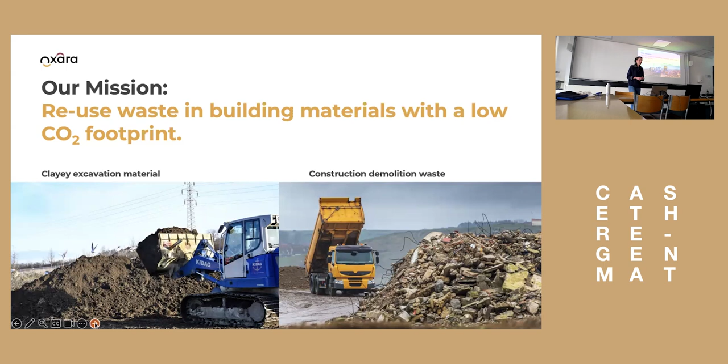The mission of Oxara and our goal is to reuse the waste from the construction industry in low carbon footprint building materials. The two main waste streams that we are addressing are the clay-based excavation waste and the construction and demolition waste. I want to name a few numbers to show the importance of these wastes.

Based on data from 2022 in the canton of Zurich, there were 3.5 million cubic meters of excavation waste produced. Of these, around 65% are used to refill gravel pits or raw material quarries, meaning this material fills holes dug for sourcing raw materials. Another 5% are landfilled in the canton of Zurich, and 21% leave the system boundaries of the canton, meaning it gets landfilled in another canton.

About 9% are reused directly in construction. So the reuse quote is actually pretty low as a building material.

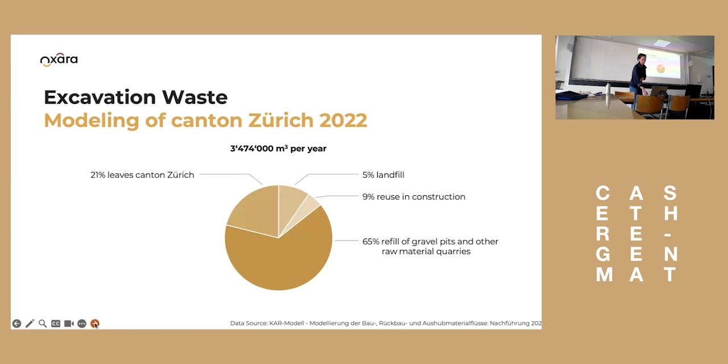On the other hand, compared to the 3.5 million cubic meters of excavation waste, we have around 1 million cubic meters of demolition waste produced each year in the canton of Zurich. There, around 90% are reused in construction, and a really big part of it is reused as recycled aggregates. As a comparison, data from 2018 for the whole of Switzerland shows around 60% is reused as recycled aggregates. The rest is either landfilled or leaves the system boundary of the canton.

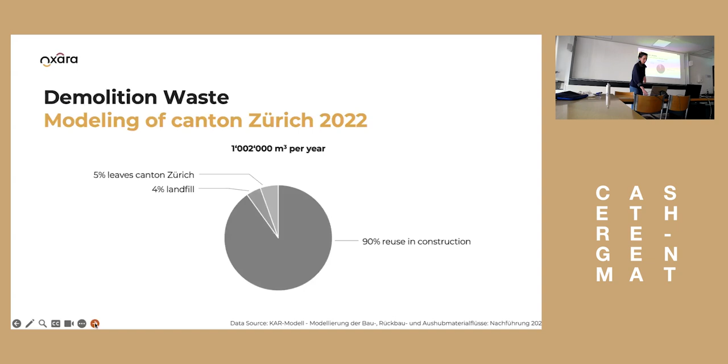So these waste streams that we have each year are huge, and we need to propose good solutions for these wastes. Oxara wants to do it by developing admixtures and binders to be able to reuse these materials.

For your understanding, Oxara is basically like... I hope I'm still online. Yes, okay. So it means Oxara is like the admixture and binder producer, not the producer of the final building material. The building material, the poured earth, is then produced by a material producer like KIBAG, and we are producing, in analogy, the cement like Holcim or the admixtures like Sika. This is our role in the industry.

Schematically, it can be explained like this: for all our building products that we develop, we use water, sand, and gravel. For the excavation waste, we use the earth plus some admixture at a low dosage as the binder. For the demolition waste, we use the demolition waste in a milled form together with some activator as the binder, to produce the earth-based and the demolition-based products.

First of all, I want to start with the earth and some general explanations of how we want to use it. Before I start with Oxara-specific information, I want to make a small detour into some other general earth-based information that we think is important.

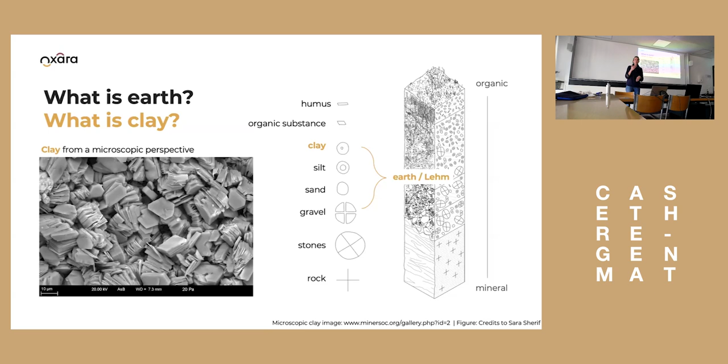On the left side, you can see a microscopic image. You can really imagine these clays are platelets, and these are silicate layers. These silicate layers are the binder of the earth-based materials, and they have a strong interaction with the water. They can actually surround the water molecules around. This interaction is quite decisive for the properties to follow.

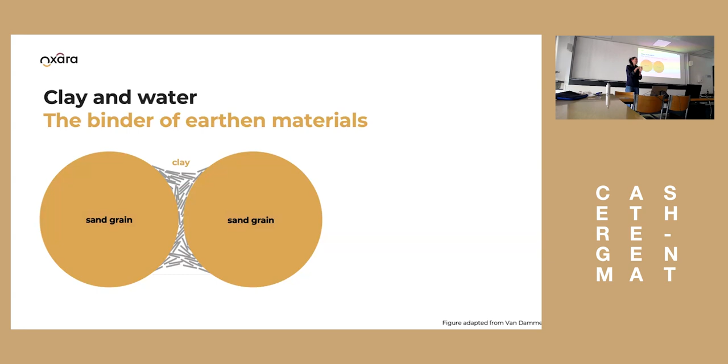To understand earthen material, it's helpful to have this picture in mind: in your earthen materials, you have the different grain sizes. You can imagine the sand grains, and around these sand grains, you have the clay platelets oriented as the matrix around. And if you zoom in even to these clay platelets, you find in between them the water that is in the very small pores as capillary bridges. It's actually these capillary bridges that give the cohesion of the clay-based building materials.

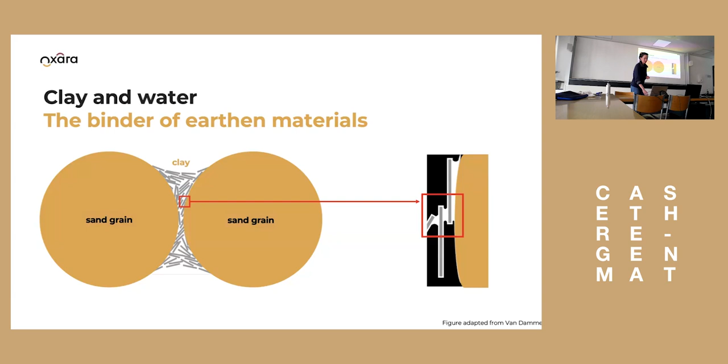It is also this water-clay interaction, and this principle, that is defining for four aspects that I want to point out on earthen building materials. First of all, on this clay-water interaction that is important, it's the drying.

When you want to build with earth, in general, you need to add water to the clay to make it workable to whatever consistency. And once you place your material, it needs to dry - really dry, so all the water needs to evaporate, unlike in cementitious systems, for instance, where the water gets bound by a chemical reaction. Here, everything that needs to go out needs to evaporate.

And that takes time because it goes over the surfaces. It's important to keep in mind that if you, for instance, double the size of your wall, you don't double the drying time - it increases exponentially, as this is not a linear process. So drying times in earthen constructions take time.

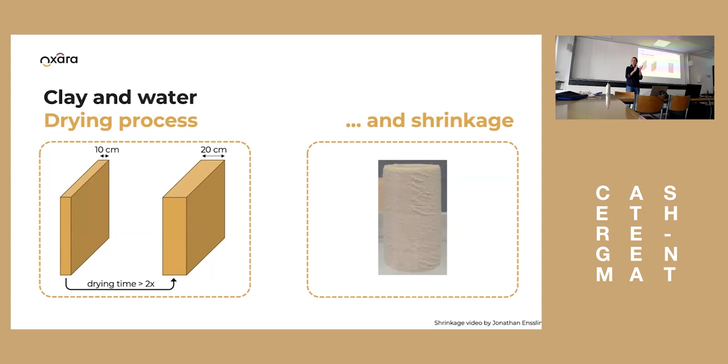And then along with the drying comes the shrinkage. You have the water around these clay particles, and at first, maybe the clay particles don't touch each other because they're separated by the water. Then once the water starts to dry and evaporate, it leaves the system, and that leads to a volume change. That volume change can be quite drastic, as you can see here in this video, where you can see how a clay cylinder shrinks.

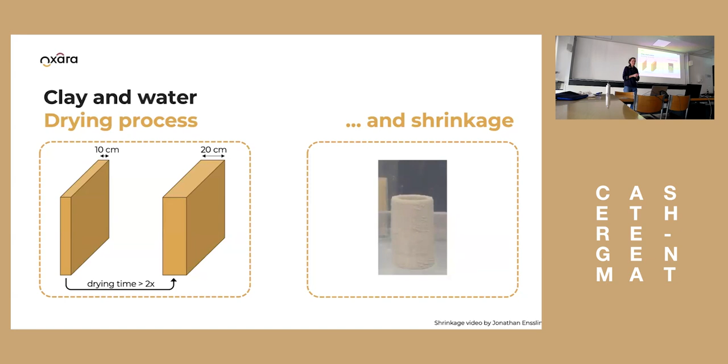I can play it maybe one more time. This is, of course, a very extreme case when you have only clays and not sand and not gravel, which reduce the shrinkage. But yeah, earthen materials have shrinkage. This is because if the water withdraws, these capillary bridges also pull the material together. It's important to keep this in mind for earthen construction.

The second aspect is the compressive behavior of the earth-based materials. You might have heard that earthen construction materials should be used as compressive load-bearing materials. They are very weak in tension or in bending, and this is also due to how they get their cohesion. It's important to know that the compressive strength is dependent on the moisture content of the material, or on the relative humidity that you have in your room.

The reason is that the clay, or the clay-based construction material, can absorb the moisture, so it gets adsorbed around these clay particles. But if you have this water adsorbed around the clay particles, it also means that you weaken these capillary bridges that I was showing in the beginning. So you lose the strength when it gets more moist.

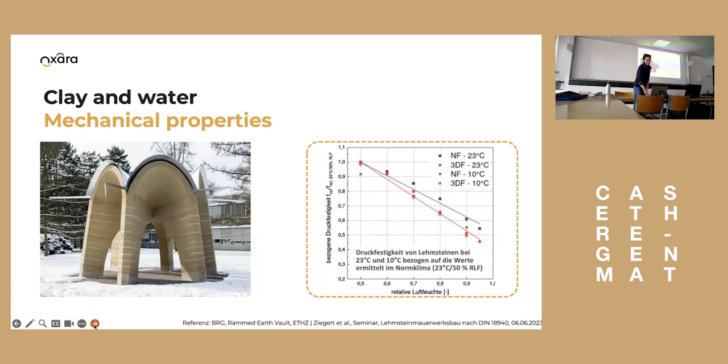Concerning building physics properties, the density of massive clay-based construction materials can be assumed around 2,000 kilograms per cubic meter. Clay itself has a high thermal capacity due to its mass, but it also has a high thermal conductivity, so massive clay is a bad insulator. Clay in a massive construction technique can give good sound insulation, and it's non-flammable. So that's concerning the building physics properties.

I think in the slides before, high thermal capacity and so on - I think these are linked to some depth of the wall. You cannot have a very slight wall and then have a very high thermal capacity. All these are linked to something, you know what I mean? I know what you mean.

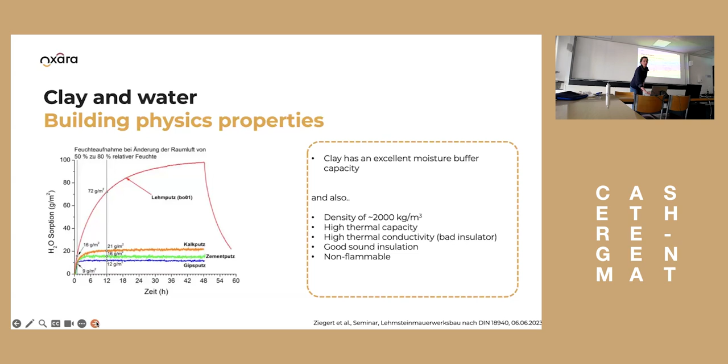Of course it is linked to the thickness that you bring. If you only have a 2 centimeter clay plaster, you don't bring a lot of mass. But the point is that the particles of the clay itself have a high density, around 2.7, and if you have them well compacted, you can bring a lot of mass into the building. Compared to some other materials which don't even have that basis, you can use clay in that way. It would be interesting to know when we can say a wall has this high thermal capacity and from which point - so that we understand what it means to build a compact wall or not. We can maybe get back to it at a later stage.

The fourth aspect, related to this clay-water interaction, is durability. The clay platelets are not bound, they're held together by water, but that also means that if you introduce more water, the clay material is not stable. So earth-based construction materials erode when exposed to rain, and they are not water resistant. Here is a picture of the Vogelwarte Sempach, where one facade part was exposed to the rain, and another was protected from the rain by a balcony. As you can see, the difference is big, and I think this is something to keep in mind as a general aspect for earthen construction materials.

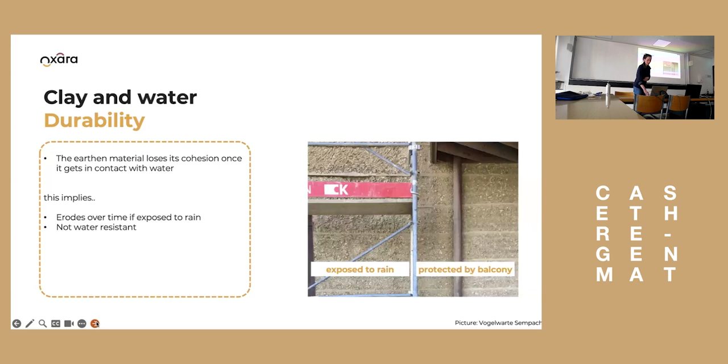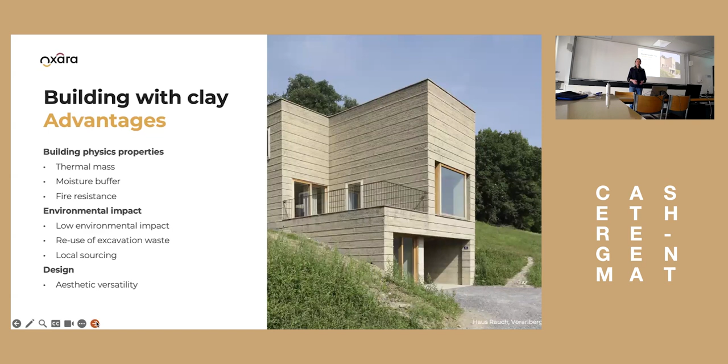To summarize on earthen construction materials, we have the following advantages. From the building physics property side, you can use clay-based building materials to introduce thermal mass into your building. You can use it as a moisture buffer if used in the interior, and it can give some fire resistance, also protecting other building materials. The advantages on the environmental side are a low CO2 footprint - you reuse excavation material, which is currently more or less dumped material, and you can source it quite locally as it is widely available. Also for design, the options on how to use it are broad.

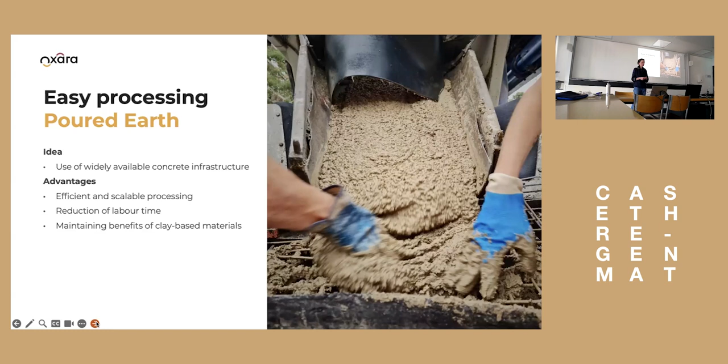But then the question arises: it has advantages, it's widely available, but why is earthen construction not more used? There are many reasons, and one we want to tackle is processing. Some vernacular construction techniques use a lot of human power and need more effort, and Oxara is looking into easier processing. The idea is to make the earth pourable, and if it's pourable, you can use the same infrastructure already widely available for conventional concrete. The advantages would be faster processing and a reduction of labor time, but while maintaining the clay-based material properties.

So this is the idea, and how does it work?

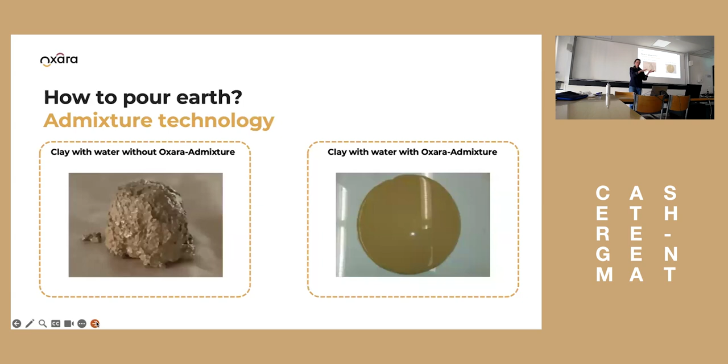The idea behind the admixture technology is that if you have clay and mix it with a certain amount of water, you can reach a plastic state. You could reach a more liquid state by adding more water, but you don't want that, because adding more water means much higher shrinkage and too much water introduced. Later it cracks and loses its strength.

So the idea is to change from plastic to liquid with an admixture, not by adding water. Going back to these clay platelets, they have a surface charge: on the edges they are charged positively, and on the sides negatively. In a normal state, the positive charges are attracted by the negatives, and the clay platelets arrange in a card house structure, which allows them to hold a lot of water in between.

If you introduce a dispersant, an admixture that changes the surface charge on the edge from positive to negative, the edges get repelled and disperse. If they're oriented in this parallel way, they can much more easily slide past each other, giving you higher fluidity with the same amount of water. That's the principle of the admixtures we are using.

Then if you want to stop the fluidity because you've placed your material, you want to reverse that effect, and you do that by adding a coagulant that consumes the dispersant.

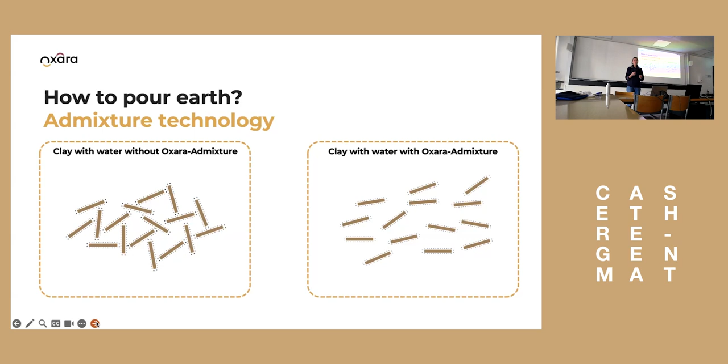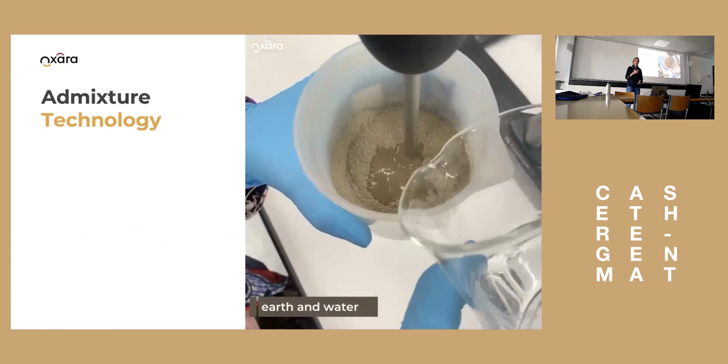Here we have a lab demonstration on how this works. First you mix the dry earth with a certain amount of water, and then you mix. With this amount of water, it's not fluid, because it was not enough water.

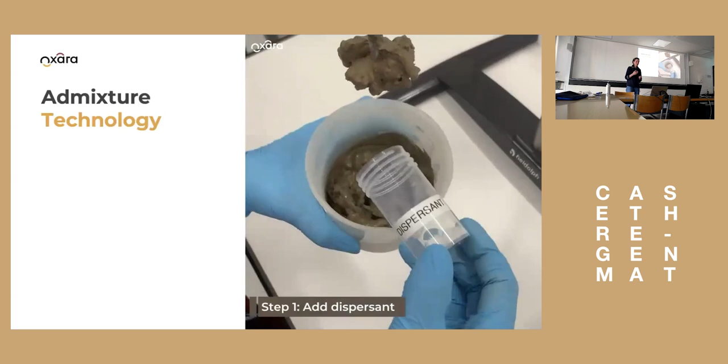Then you add the dispersant and mix it in, and you get a very well flowable paste that is also suitable for processing on a construction site. Then you add a coagulant.

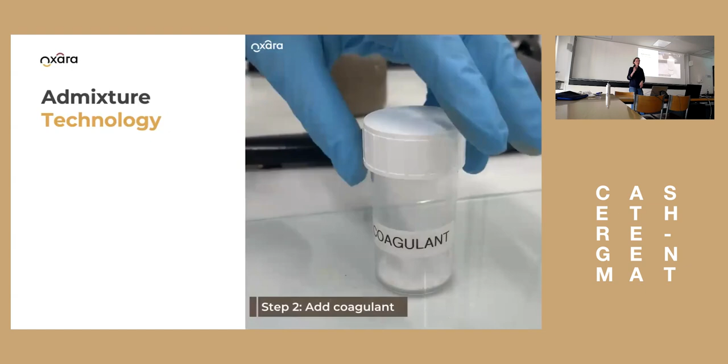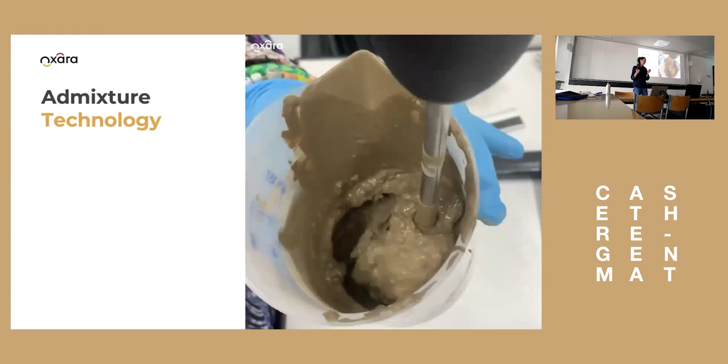Here in this video, for demonstration purposes, we use a coagulant that reacts really fast. As you can see, it already starts to stiffen. But of course, on a construction site, you don't want such a fast reaction, and it's also not possible to add this coagulant after you've placed the material.

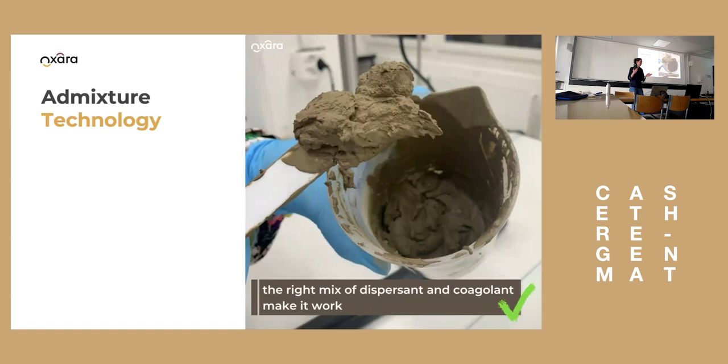So everything needs to be added at the beginning when you mix the material, but that means you need to choose a coagulant that reacts rather slowly, so you have enough time to process the material.

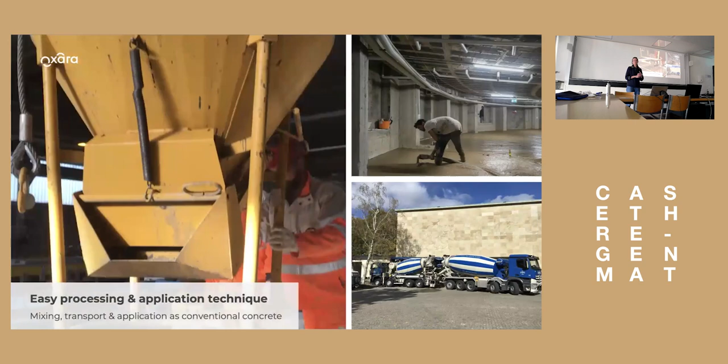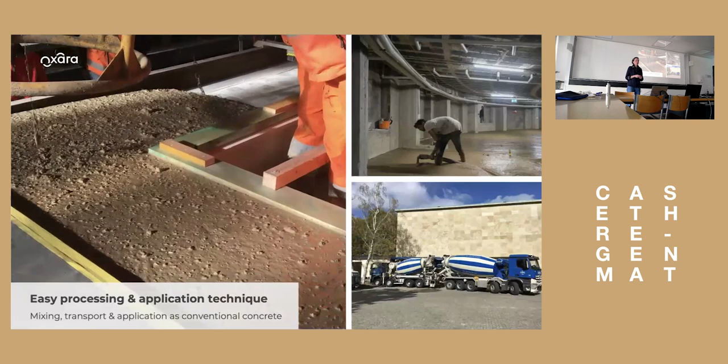Here you can see in this video how that looks on an industrial scale. The material can be processed with conventional concrete infrastructure, and it can also be pumped, as you can see on the right-hand side. So this is the basics of our technology used for clay-based construction materials.

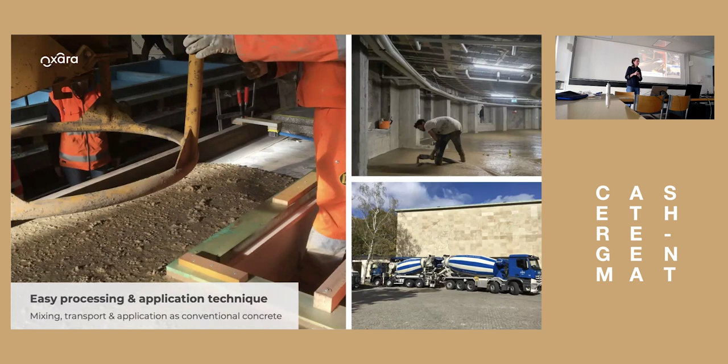Of course, when speaking of admixtures, the question soon arises of when the earth is still unstabilized, and when it is stabilized. I think it's a very important discussion to have, and for each project you should carefully consider what is more suitable. That's why I want to quickly dive into the topic of unstabilized and stabilized earth.

The way we see it, unstabilized earth is earth that is not water resistant. It's still soluble in water and dissolves, as its strength mechanism is only drying. So if it only gets its strength from drying, then if it's in water, it dissolves. This is unstabilized earth.

If you introduce a reactant or chemical that consumes water and reacts with it, binding the water and also binding the clay platelets—more or less depending on the dosage—then you stabilize it, and you can put it into water and it will not dissolve anymore.

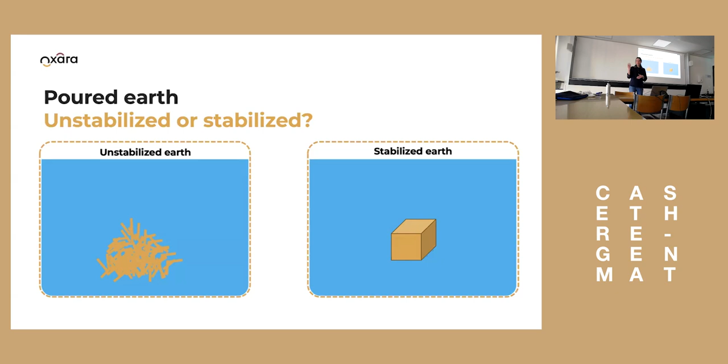Often at first look, one could say it's very practical to stabilize the earth, because then you avoid challenges like its strength depending on moisture content, or needing to take so much care on durability. But of course, it's not that easy.

I think the careful evaluation should consider the following points. For unstabilized earth, as I said, it dissolves in water, and the stabilized doesn't. This is because the source of strength is purely the drying for unstabilized, while for the stabilized one, it's the drying plus a chemical reaction. Because this chemical reaction binds the water and also binds the clay particles together, the strength development is accelerated.

Unstabilized earth has a rather slow strength development. It also depends on when you remove the formwork or how fast it can dry. For the stabilized one, you have some reaction taking place which gives you a bit of a boost.

If you look at the dry strength or the end strength of the material, that story is not that clear anymore - what's better, unstabilized or stabilized? In general, poured earth has a compressive strength between 2 to 3 megapascal if unstabilized. If stabilized, using a low stabilizer dosage can actually disturb the clay matrix first and you lose strength, so you need a high dosage to increase strength higher than the unstabilized case, because you first disrupt this clay network when you introduce a stabilizer. So it's not the most efficient to use stabilization only for a high end strength, because then you often need high stabilization dosages.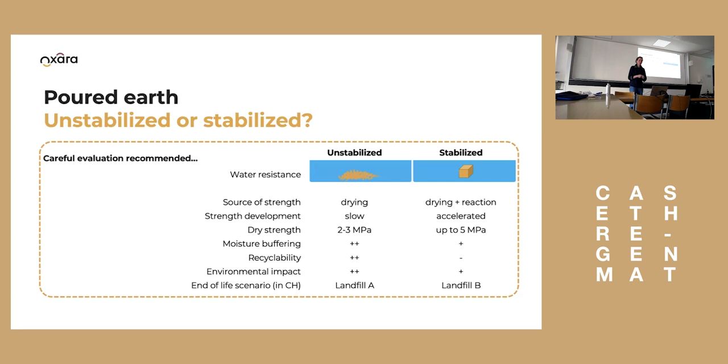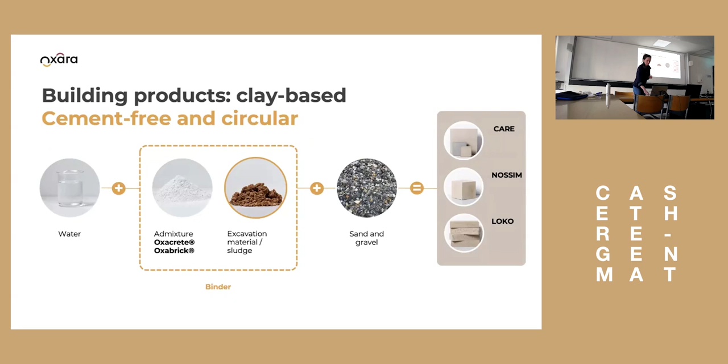Having said this, now we go back to the Oxara earthen product. As a reminder, the way we use it: we have the water, the clay and the admixture as the binder, add sand and gravel, and from this we have 3 different building products. We have 2 poured earths - the Oxara Care, which is the unstabilized poured earth, and the Oxara Nossim, which is a stabilized poured earth. And then we also produce a stabilizer for compressed earth blocks.

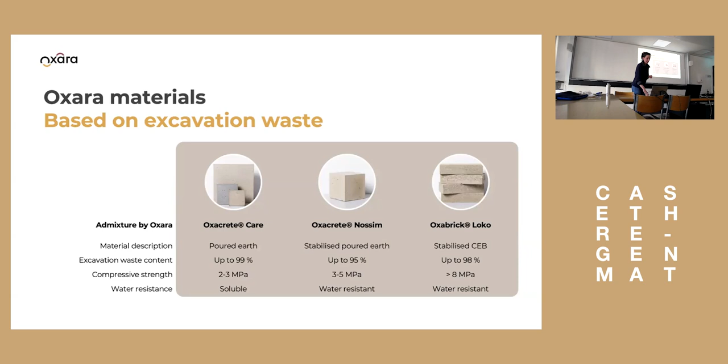Then there's the question of how to use this material in a building. We recommend, to benefit from the moisture buffer capacity of these clay-based building materials, and also because durability is limited when exposed to rain, that interior use for earthen materials is suitable. In interior use, we recommend either non-load bearing or very low load bearing walls or screeds. Also very suitable are hybrid elements where, for instance together with wood, the wood can do the structural part, and the clay and massive earthen construction material can give thermal mass and take the moisture buffering. So these are the 3 main applications for earthen materials that we see.

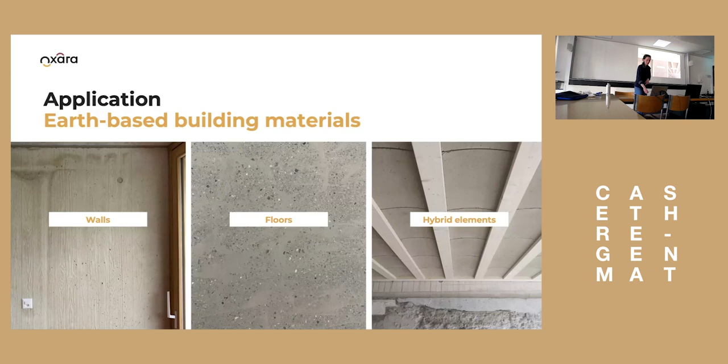Now I want to present a few project examples. The first project example: there were 2 houses built in Vandœuvres, a garage and a pool house. It's a 1-story building, the walls are not load bearing. This was done with stabilized poured earth because the client and the contractors chose to build with it.

What's special here is the detail of the walls, you can still see the texture of the wood from the formworks. This is only possible because the poured earth is in such a liquid state that it can actually adapt to the structure.

We recommend interior use, but a lot of people, if they use earth, want to display it towards the outside too. Then it's very important that you use a good hat and shoes, as it is done here. The roof needs to protect the walls from the rain, and the concrete part at the bottom needs to protect the earthen wall from capillary rise from the ground.

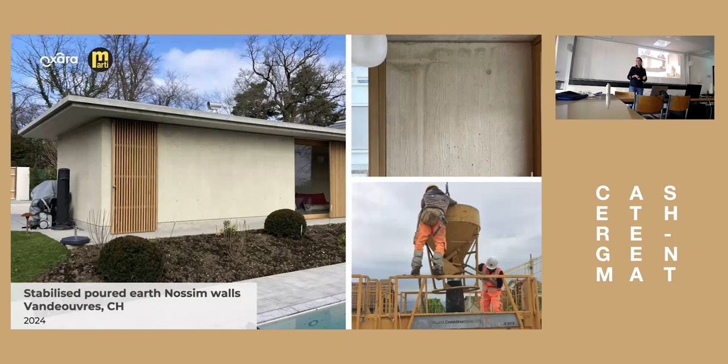Here, quickly, the technical specifications summarized. We recommend for this poured earth wall a thickness larger than 25 centimeters, and a maximum height of 4.5 meters, because if you go higher it gets tricky to demold the walls. With a prefabricated process it might be different, but if you want to demold, you need enough strength to take away the formwork, and if you don't want to overstabilize, there is a limit in height.

You need to plan dilatation joints, we say every 4 meters, to avoid shrinkage cracks.

On the environmental impact, we compare it to a calcium silicate block wall of 18 centimeters. If you compare the Nossim wall to this block wall, you have a reduction potential of 40% in CO2 equivalent.

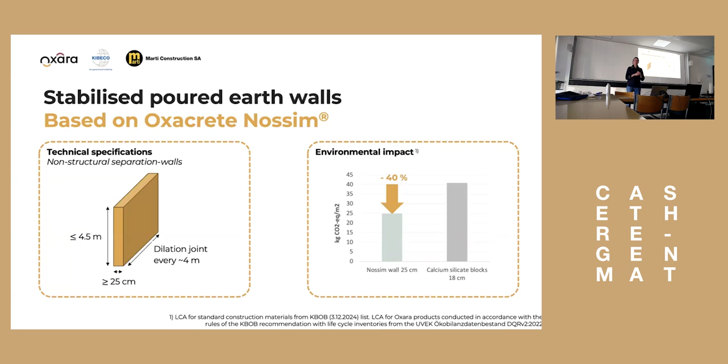So I go on to the next application and project example. Here you can see the first residential floor that we built at Ackersteinstrasse in Höngg, Zurich.

For this project it was a concrete slab, then some cork insulation, and an 8 centimeter thick floor casted on top. It was cast in situ by pumping and then left to dry. The floor cracked, and the cracks were filled with an earthen mortar, then they made a terrazzo finish, meaning they grinded and polished it as is known for terrazzo.

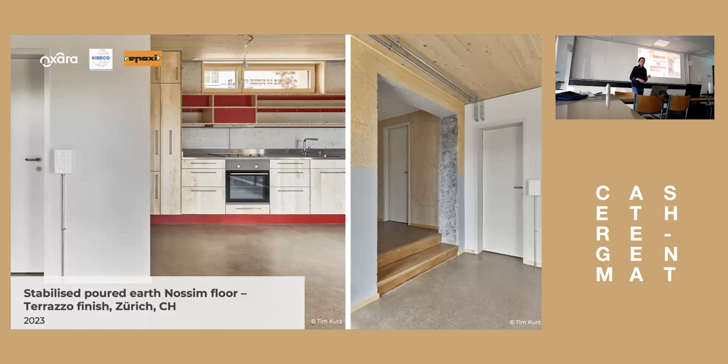For the floors, we have the following recommendations: earthen material or poured earth can be used for screeds or terrazzo floors, but only for residential areas, because for public areas the point loads are too high, and also the possible abrasion that can happen.

You need to look for a suitable surface treatment. We currently recommend some Wasserglas, so sodium silicate, and some stone oil that we are using, but this is still a bit of trial and error, also depending on what's most suitable given the project or where the client feels confident enough to use whatever surface treatment you propose.

It's compatible with floor heating, which can actually be beneficial for earthen floors, as you can speed up the drying process when you start to heat. For the build-up, it's important that between the earthen layer and the sound insulation, which is rather soft, you have a load distribution plate, because the earth is soft as well, so you need to distribute the point loads and avoid too much bending caused by the acoustic insulation.

If we compare the Nossim screed of 8 centimeters to a cement screed of 8 centimeters, there's a saving potential of around 45%. But as this is a stabilized floor, it's not easy to say one number, it also depends on the stabilization dosage you are using.

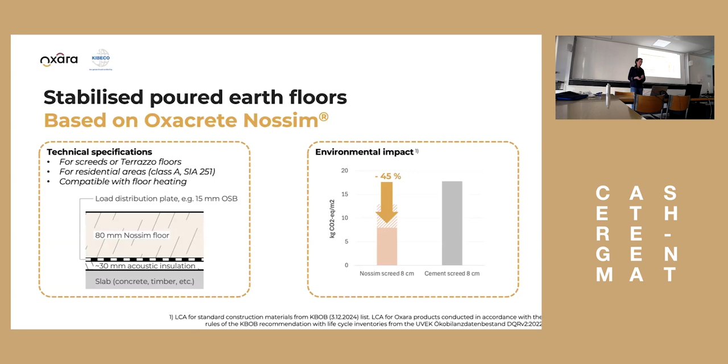For the screeds, we recommend 8 centimeters. With other conventional building materials you can go lower, but as the earthen material does not comply with the norm for screeds, we recommend higher thicknesses so you don't get problems with bending.

Another project I want to present as a representative of an earth-based hybrid project is a timber earth slab at Altichesi in Rotkreuz. It's an old cheesery where they built a hybrid earth-wood ceiling, and the ceiling was cast in situ since it wasn't possible to bring prefabricated elements into the building.

For hybrid wood elements in general, it doesn't need to be a ceiling, but the two materials can profit from each other: the wood takes the structural part, and the clay-based materials bring the mass, the moisture buffer, and some acoustic insulation.

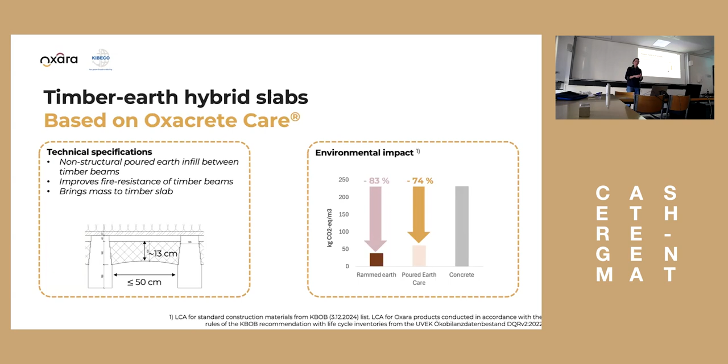You can see the dimensions used in this project. Concerning the environmental footprint, we don't have numbers comparing this building system to another slab, but we can present the CO2 footprint per cubic meter if used as a filling material. Comparing conventional concrete as a filling material to poured or rammed earth, you have savings potential up to 80%.

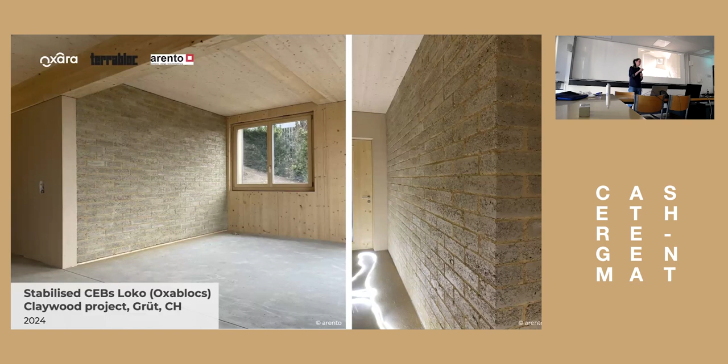The last project on the earth-based side I want to present is the blocks, used in a residential building in the canton of Zurich. They serve as sound insulation and separation walls. A clay-based mortar was used to mason the stones together. The blocks are produced by Terrabloc and available in the dimensions shown.

You can use either a clay-based mortar or a conventional mortar. The tricky thing with the clay-based mortar is that it's not commercially available everywhere, so you need a supplier or source to get it. It's harder to get, let's say it like this.

For the blocks, there's the SIA norm 266, which declares masonry. This declared masonry doesn't specify the material it needs to be made of, but defines material properties, and the stones and mortars comply with this norm so you can build using declared masonry. Comparing the Oxara blocks to fired clay bricks, you have a saving potential up to 50%.

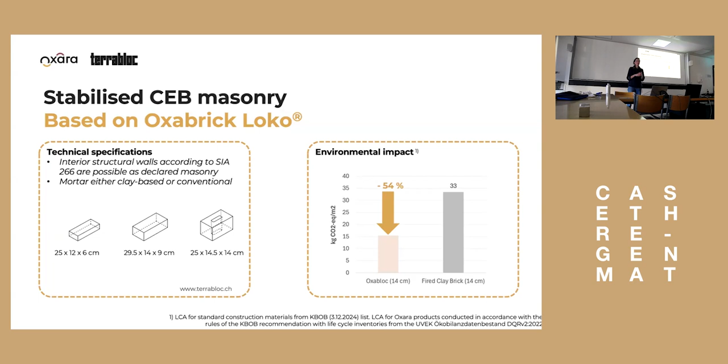The outlook on earthen materials from our startup side is that we continue doing research. In the Innosuisse flagship Think Earth, we have a sub-project researching robust earth mixes, trying to make a step towards industrialization of earthen materials, and also testing large-scale earthen building elements like walls or bigger masonry to study the scale effect.

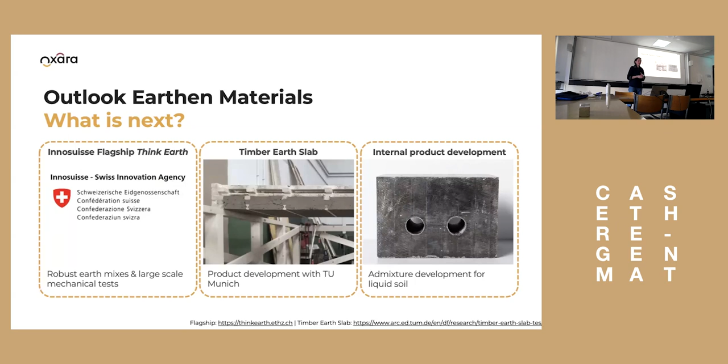We're also engaged in a timber earth slab project with the TU of München, researching producing a hybrid ceiling element. Internally, we're developing a liquid soil used to fill trenches and surround pipes to protect them, and our goal is to do that without cement.

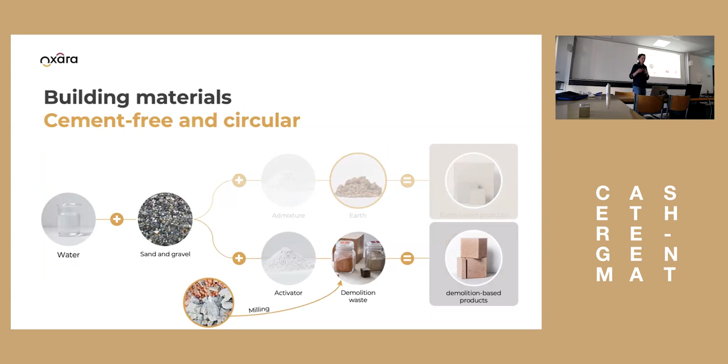That was the earthen side; now we'll jump to the demolition waste-based side, where again we use it as a milled material. First, what is demolition waste and how is it used nowadays in Switzerland? Demolition waste is a mixed composition of bricks, concrete, natural stones, and other mineral construction materials present in a building. There's a distinction between concrete waste, which is pure concrete waste, and mixed demolition waste.

It's produced in the following way: if a building gets demolished, you first demolish the upper floors, and very often these aren't separated, so the bricks and masonry aren't separated from the concrete, generating mixed demolition waste. There are two reasons it's not separated: first, it's too expensive; second, if you just took the concrete waste out, you'd lose quality for recycled aggregates. You actually want a certain fraction of concrete aggregates inside your mixed demolition waste, because that increases the quality of the recycled aggregates.

When the floors below ground are demolished, that's often where you get pure concrete waste, because the floors below ground are very often built in pure concrete. So you can see the composition of demolition waste can vary quite a bit.

It's very heterogeneous, and it also depends on what building you demolish, from which year it was built, because either it has a higher percentage of masonry or a lower one.

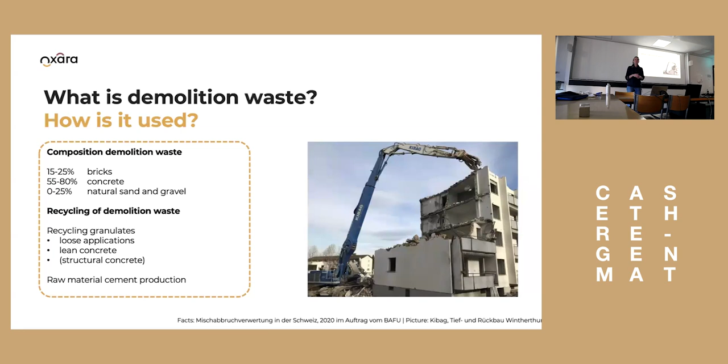And then the fourth option is to not use it as recycled granulates, but to use it as a raw material in cement production. And if it's used in cement production, it is milled. An example for this is the Susteno cement.

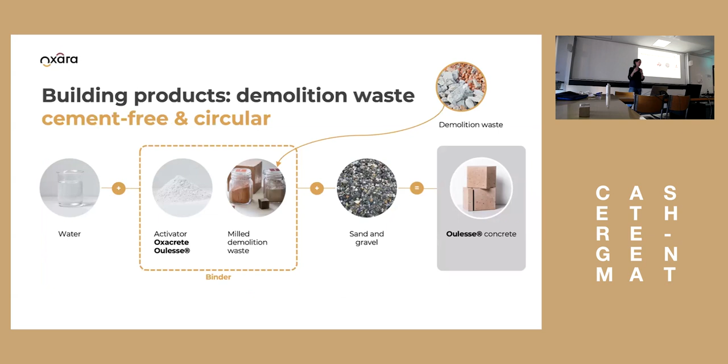So now I'm going to show, illustrating again how Oxara is using it. We are milling the demolition waste and combining it with some activator, and then we have water and this binder of milled demolition waste, where the demolition waste accounts for up to 50% or around, and then we add sand and gravel and have a concrete-like material, but with a cement-free binder.

We are following this strategy because we see the need to propose a solution for the fine fractions of the recycled granulates too, since these particle sizes can vary a lot. By milling, one can at least control this heterogeneity, and that's the approach we want to take, using it in the milled form.

The advantages of using demolition waste in construction materials are, let's say, obvious. You reduce the CO2 impact of the binder you create, and that means you also conserve natural resources by reusing the demolition waste, and you save landfill space. So for an idea, if you use 1 ton of that binder, you can save up to 400 to 600 kilograms that would otherwise go to the landfill.

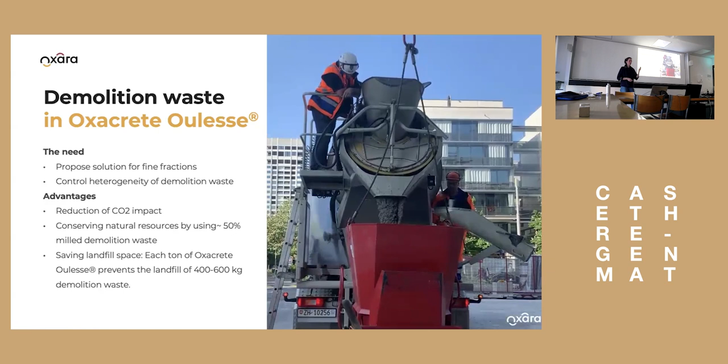There is a little illustration in the video on how it's cast. So if you see it from the outside, it's really similar to concrete and used similarly.

Now I want to give you an overview of the technical specifications of that cement-free binder. The technical specifications relate to exposure class, so for what you can use that binder, for which kind of concrete, in which application. The exposure class is basically X0, so it should not be critically exposed to either freezing and thawing or to carbonation.

Quickly on carbonation: when you have a cementitious concrete, it has a very high pH, so it's alkaline, and that high pH protects the reinforcement bars in the concrete. So for cementitious concrete, you have protection from corrosion by the high pH of the concrete.

Carbonation means that if CO2 from the air ingresses the concrete, the CO2 reacts, and that reaction decreases the pH. So you want to make sure that the pH of your concrete stays at a high level so that your reinforcement bars are protected from corrosion.

So one is actually measuring, for binders, the carbonation resistance, meaning how fast they carbonate, how fast they lose their pH. In our case, the Oulesse binder has a lower pH and it does not comply with these carbonation limits given for where carbonation limits are required. That means that if you use a reinforced Oulesse, currently you have to use it in applications where corrosion is not happening because there is no moisture.

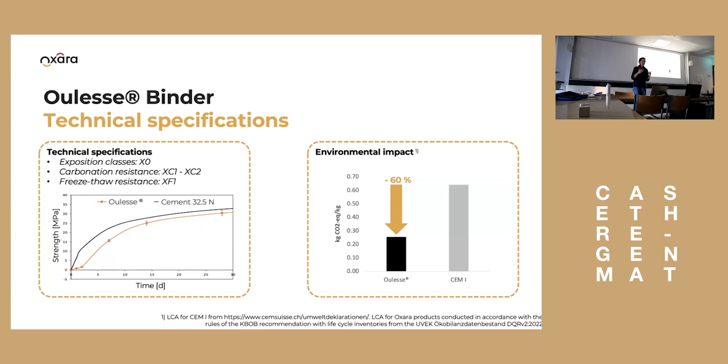Then for the environmental impact, compared to CEM I, the Oulesse saves up to 60% of the CO2 footprint. So to summarize, for this new binder, as is often the case with alternative binders, you need to be careful with the exposures you use it for, because it cannot fulfill the carbonation limits, and in this case we also have the limited early age strength development.

With that in mind, based on our current development state, we are working on the following applications and propose lean concrete, screeds, and pavers. The reasoning is that they are not critical in terms of exposure, they are not reinforced, and they don't have a formwork where demolding times or early age strength development might be critical.

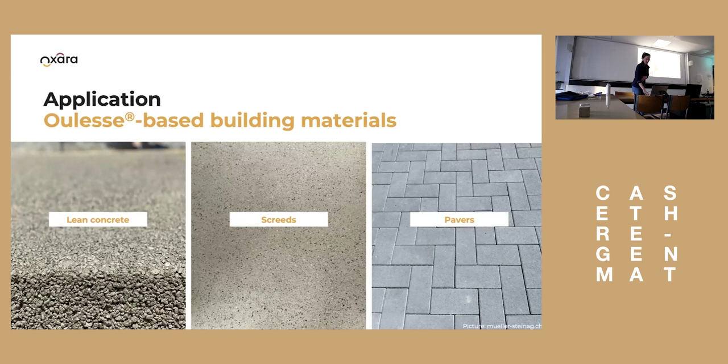Yes, these are the three applications, and here are a few project examples. Here you can see how the Oulesse lean concrete was built in at the Zurich airport by Kibeco.

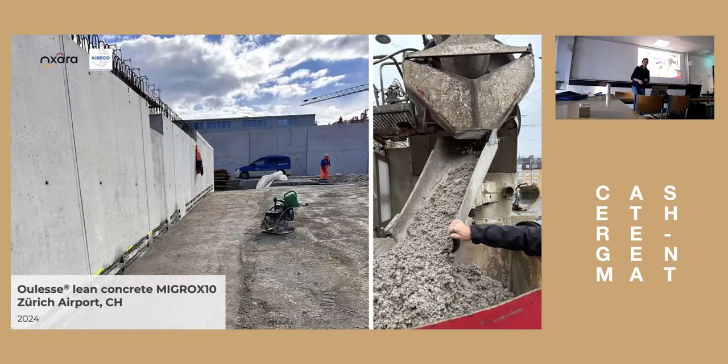On the left side is really the first terrazzo of Oulesse that we tried in our labs, and then this Oulesse terrazzo was built into the Pavillon Manal in Horw as the first screed, built in by Repoxit.

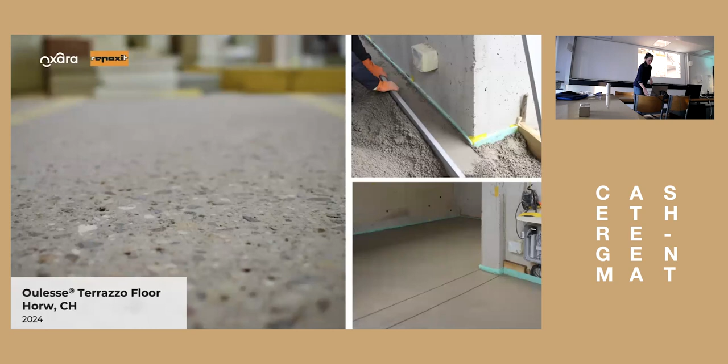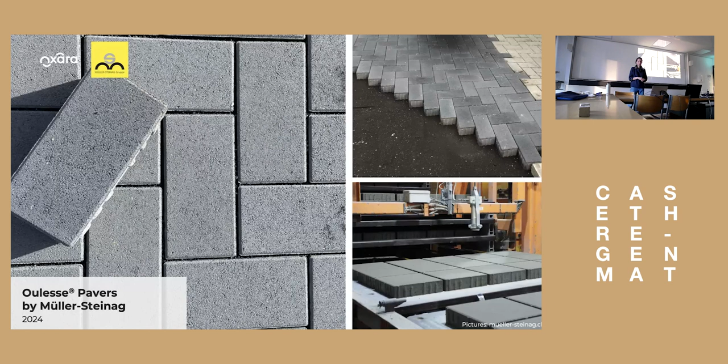And we have this development with Müller-Steinag on the pavers that are produced by Müller-Steinag. When using Oulesse, they can save up to 30% of CO2. So these are the three applications for Oulesse.

What is next is that we are internally working a lot on reactivity, to give it this initial boost so that we have a similar strength development curve as conventional binders, and we're working on development towards a structural concrete.

Then we got a grant from InnoSuisse for a startup innovation project, about the production scale-up of this binder and bringing it to market. And we are working on the certification to get this binder certified.

Currently in Switzerland, for binders to be certified, there is a minimum amount of cement that you still need to introduce into your binder, and ours doesn't have cement clinker in it. So we need to find a way to certify this binder, which would open doors to use it according to the norms.

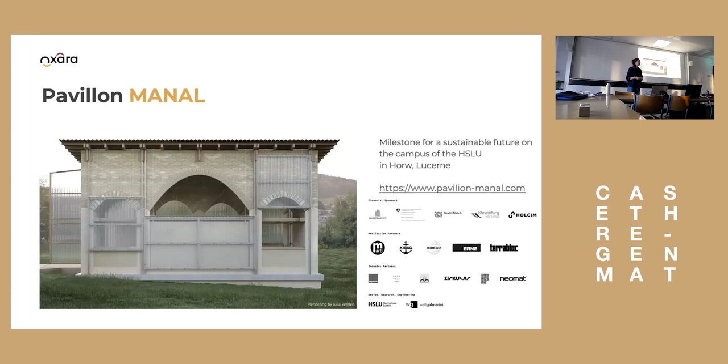Yes, and then the last project I want to present is the Pavillon Manal. It's a pavilion that was built by Oxara and our partners to display all the construction materials that Oxara developed so far. The building materials were produced by Kibeco and TerraBlock, and the construction works were done by Marti and Erne.

We could officially open this pavilion in November last year. That was a nice event. And here we display all the construction materials.

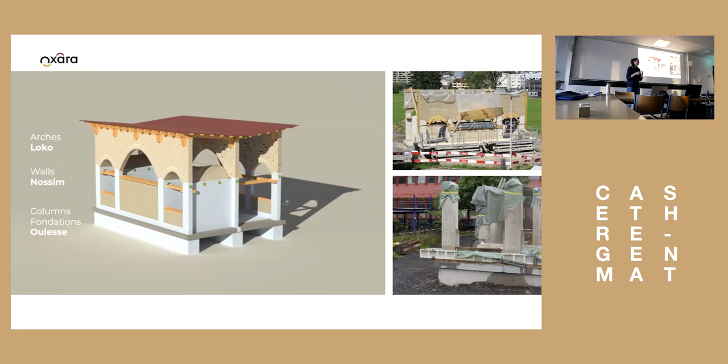For the foundation, we use the Oulesse, also for the load-bearing columns. In between the columns, we use the Nossim as separation walls and non-load-bearing walls. Then for the arches, we use the Terrabloc blocks, or the Oxa blocks, which are load-bearing and bear the loads of the roof.

Exactly, and now this pavilion is used as an exhibition space for Oxara, but also an exhibition space for the Hochschule Luzern to display architectural projects. It's also part of this flagship project, where it serves as a case study.

In case you're interested to see, feel free to contact us. We are very happy to show this pavilion.